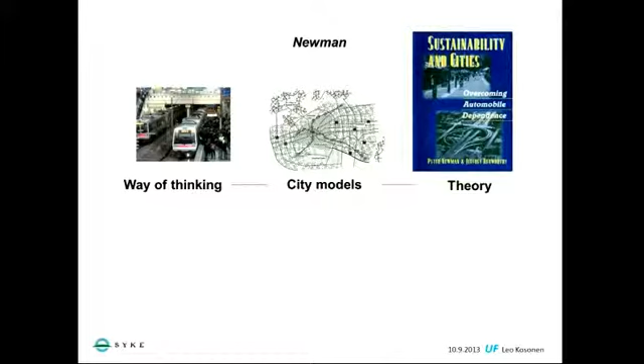Peter Newman, as you heard, is very experienced in theory, global cities. He's been using the same type of model, but he also has a long practice in local questions. So, in a way, we have very much in common, and especially the model. Basically, the models are showing that our way of thinking is very parallel, and it's been very useful to meet Peter and to have discussions with him.

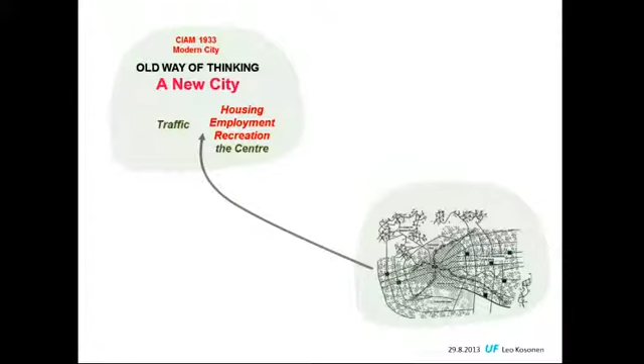The basic thing is that we need a new way of thinking. I faced it quite early in my work. You all know this present way of thinking. It's based on old ideas of a new city 60, 70 years ago. Everybody can recognize these three functions: housing, employment, recreation, and traffic, which is combining these functions. Actually, they are not functions, they are land use categories.

Actually, we have a pattern of two main systems to analyze our cities, and we have two types of models. We have land use models and traffic models, network models. And that's quite a strange situation, because the cities, as Peter was showing, are a combination of three fabrics, three comprehensive systems. And we try to analyze and supervise this combination of three systems with tools which are based on two systems which don't recognize these basic three systems.

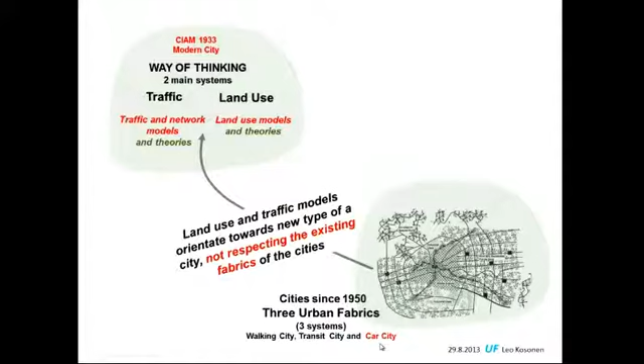So I found it's a very strange situation, and in practice it can be used mainly to analyze and improve the car city fabric. And afterwards, I understood that there's no comprehensive theory behind these models or behind this way of thinking. And so these tools were not useful when my task was to understand what's happening in terms of car city development, how to analyze it, how to deal with it. And that's the basis of the need for a new way of thinking.

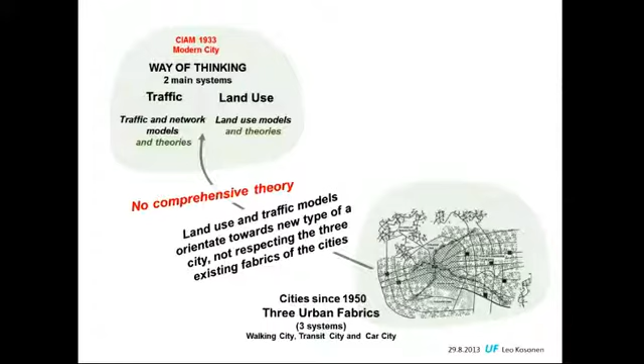So actually this way of thinking has been a serious mistake, and it has led to serious mistakes. They are useful when this way of thinking is combined with incremental thinking, so it can lead to really nice, innovative solutions. But we have seen that it has led also to really bad mistakes. Okay, so the need for new thinking.

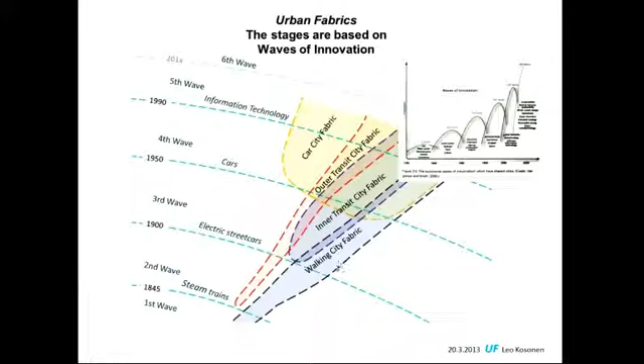First of all, it's important to recognize that these fabrics exist. As Peter was showing, in history we have faced several waves of innovation which have influenced our cities, and in terms of the fabrics you can clearly see the stages of the history of fabrics. The first stage is the walking city, which is the oldest one, and the first stages of the transit city. They were quite clearly distinguished,

or there are some theorists who have distinguished them. For instance, Peter Hall mentions two stages of a public transport city, the early stage and the later stage. So in terms of these periods, these two systems are recognized. But then the third one, which is now the situation, we have walking city, transit city and car city fabrics. That's something which has not been recognized.

And maybe one of the explanations is that the car city fabric was different from the previous ones. It was not growing only on the sides of the previous fabric, but it started to grow over the previous fabric. So from the very beginning, it was covering the whole city.

And the ideas of the modern city were also oriented towards the future. A new city which would be totally different from the old industrial walking city and old congested transit city. It would be a totally new city, and these two things, car city fabric overlapping the old fabrics, and the way of thinking that we are building a new modern city, when these were combined, everybody seemed to have forgotten that the transit city and walking city fabrics exist.

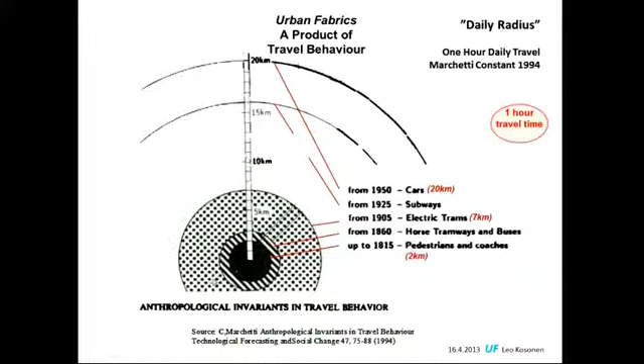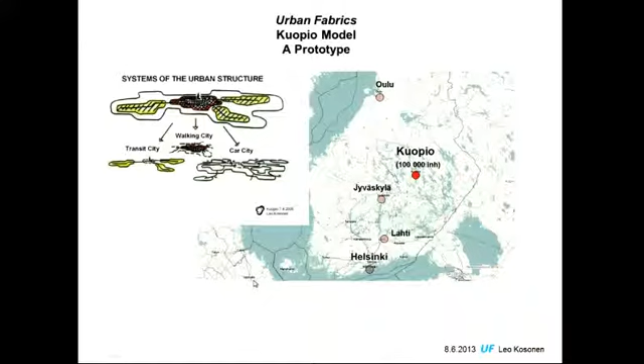And that's something which I, in my work, recognized. The same thing already some 20 years ago, when I've been working in Kuopio. The same phenomenon could be recognized also in my case study cities, which I have in this urban fabric project, which I've been doing. And it was quite clearly distinguished.

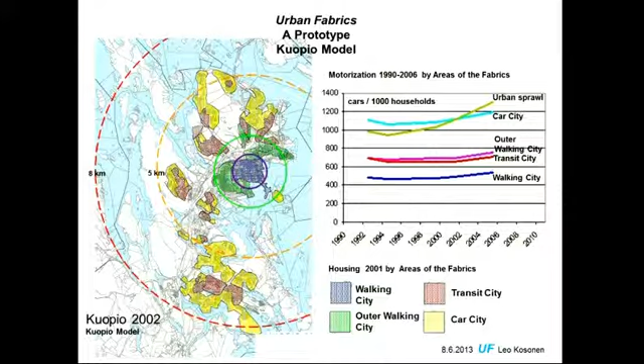The same phenomenon could be seen when I was analyzing these 4 case study cities. They have clearly the same type of structure. Of course, there are differences, but basically it's the same. I was analyzing also the stages of development.

The old walking city was clearly distinguished, and when the transit city started to grow, the car city fabric was growing even faster. So here, for instance, in Kuopio, at the same time that we had the first units of the transit city fabric, we already had a freeway bringing people from both municipalities, from north and south, to the city center, even if we didn't have cars.

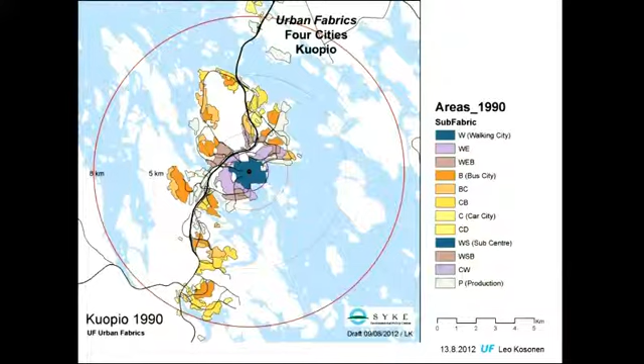The next stage was construction of the transit city fabric to its full extent, and the next stages have been construction of both transit city fabric and car city fabric. And that has happened in all these four cities.

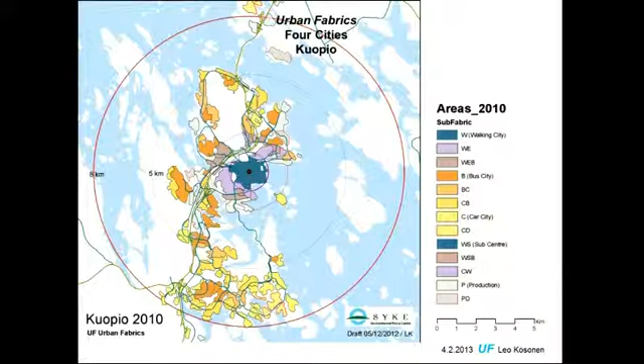So from these case study cities, I became more and more convinced that it is 2 kilometers and 8 kilometers. Actually, earlier I thought it's 10 kilometers, but based on the case study cities, it's quite clear that 8 kilometers is the width of the inner transit city fabric.

And once these circles were discovered, when I've been testing it in other documentation like this urban zone documentation, it looks like it's functioning in smaller cities, smaller towns and bigger cities. And when testing in international documentation, it's the same result.

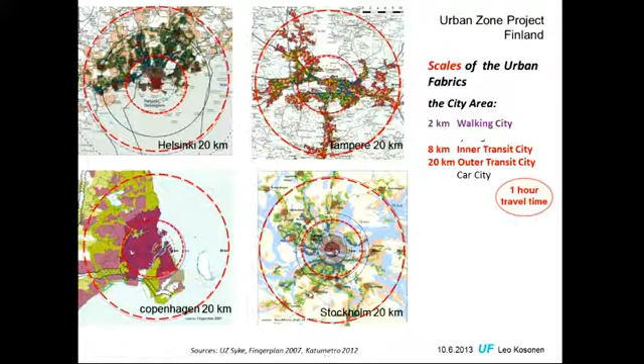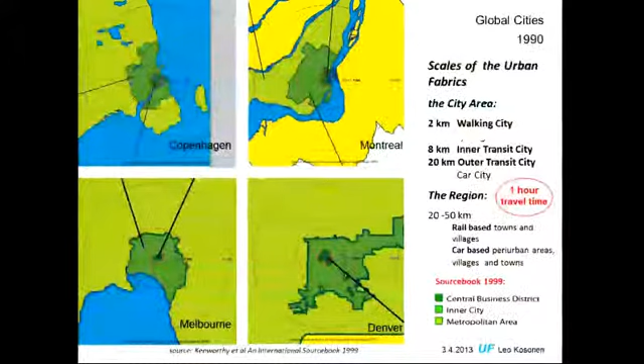And very valuable documentation is this international source book that Peter Newman and Jeff Kenworthy have compiled. I could use all the maps and data of that survey. It's an important documentation, and actually for me it's the only documentation that I could find about what has happened during the last 50 years in terms of walking city fabric and transit city fabric.

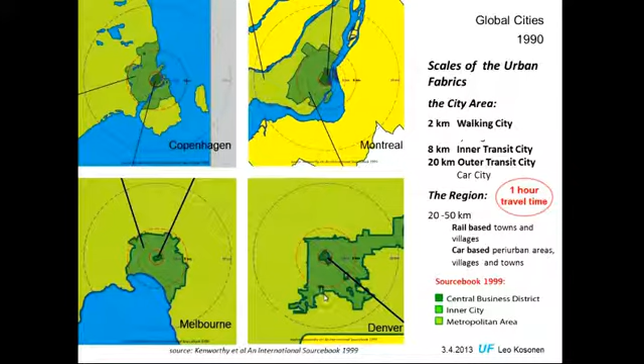And these were clearly showing the same distances, 2 kilometers for the walking city fabric, 8 kilometers for the inner transit city fabric, and about 20 kilometers for the outer transit city fabric. It could be seen from the basic maps, but very clearly from the special maps which had the documentation of transit systems in these case study cities or global cities.

And from this data, you could see the basic development, what has happened in terms of fabrics, the inner transit city fabric, which has been strong. It has lost a lot of population because of increase in the living space standard.

The car city fabric has been growing, but the basic thing is that in addition to that data, we are clearly missing surveys which would tell the history of the car city fabric or history of the transit city fabric since 1920 or 1930.

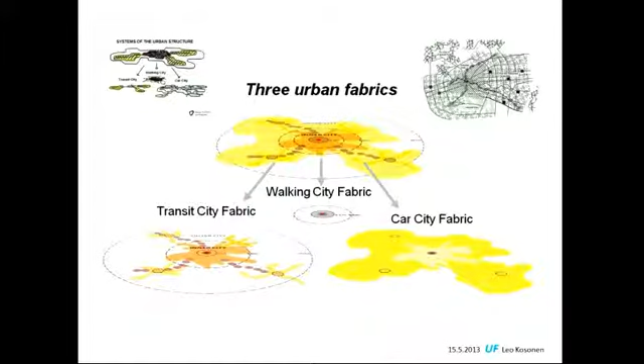Okay, conclusion: even if the documentation is not very large, we have a lot of information, data, maps, making conclusions about the basic model combining the previous ones. And these are our conclusions about the basic dimensions of the fabrics. Walking city fabric is within the radius of 2 kilometers, and the intensive part is usually within 1 kilometer.

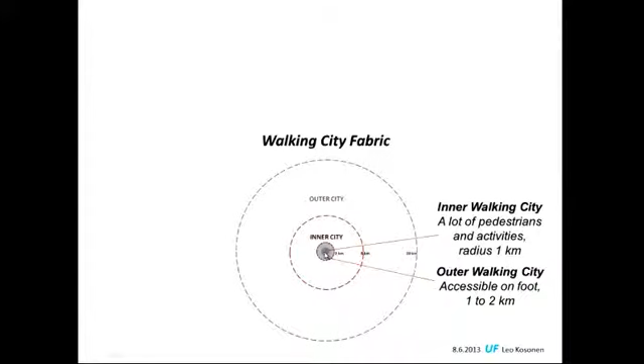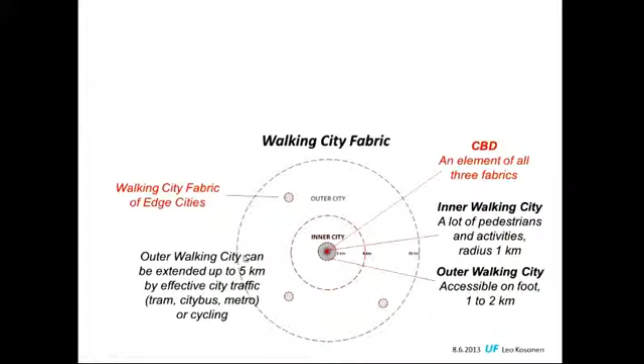But in big cities or cities like Helsinki, where walking and transit based on trams are very closely combined, the combined walking and transit city fabric can extend even up to 5 kilometers, like in Paris or London. And then there are sub-centers, edge cities, which have their own walking city fabrics.

Transit city fabric based on trams and basic bus lanes seems to be extending up to 8 kilometers. There are trams which go longer than 8 kilometers, for instance in former socialist countries where they have straight tram lines and ulitsas where trams can go fast, but there are a lot of systems where trams extend only up to 5 kilometers. But this 8 kilometers is a good scale to analyze the inner transit city fabric.

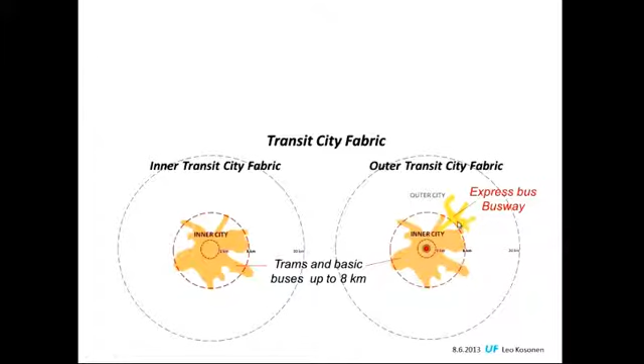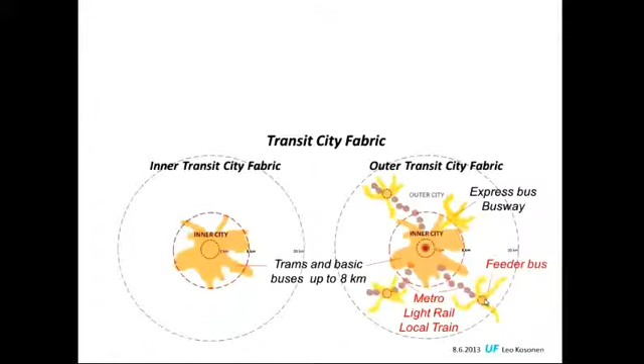Outer transit city fabric: there are two types. One is based on fast express bus lanes or busways, and the other means rail, which gives the proper capacity for the outer transit city fabric, and it also gives potential for feeder bus lanes. So basically, outer transit city fabric is either strings of pearls of railway stations, but there can also be edge cities or bigger units which have feeder lines.

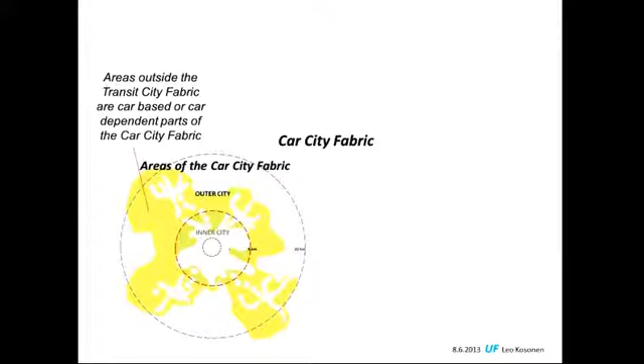Car city fabric: usually you recognize the areas which are car dependent, which are outside the walking and transit city fabric. That can be clearly recognized. It's much more difficult to recognize the rest of the car city fabric, and that's important to understand. The car city fabric is covering the whole city. It's covering also the areas of the transit city fabric and the walking city fabric.

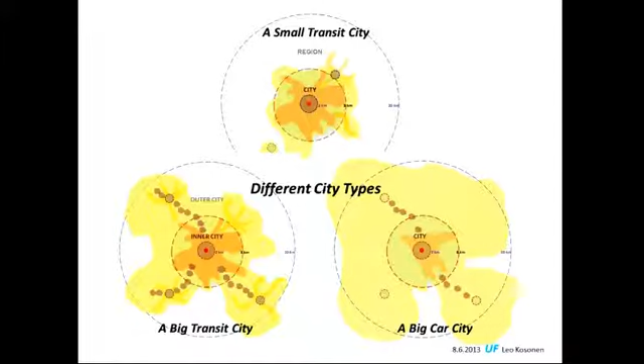So the model that we are compiling and using is not only a zone model. It's a model of 3 comprehensive systems, and they are overlapping and mixed with each other. And so cities of different types, as Peter was showing, are combinations of these 3 fabrics in different ratios. Here are some examples of how this basic model, which we feel can be a basic global model, can be used for comparison of any city in the world, of any size, of any type.

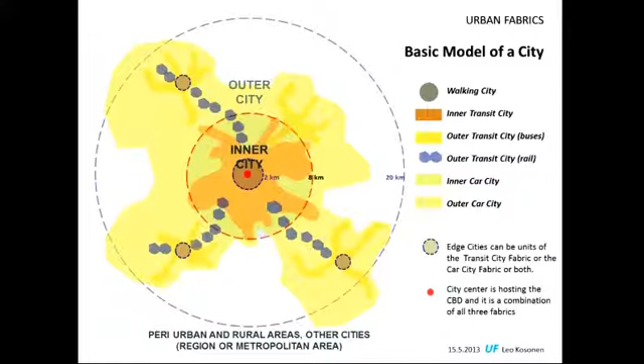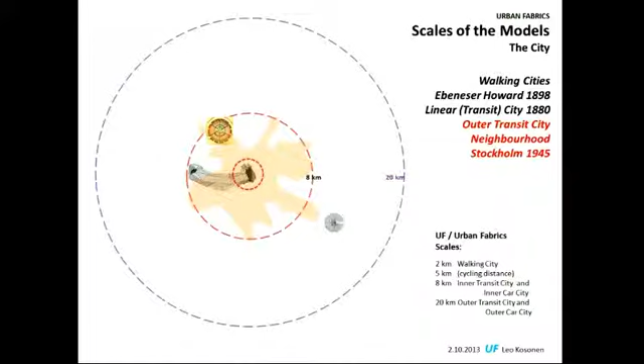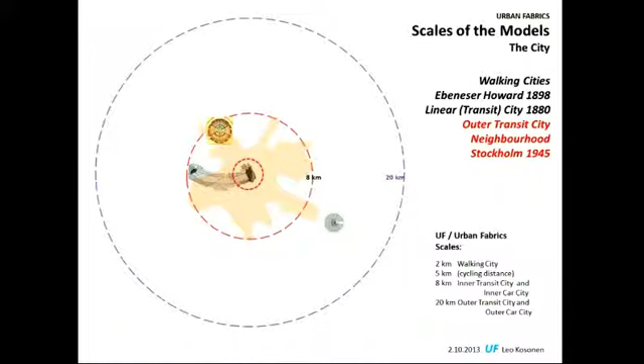The next example is a rail-based neighborhood unit from Stockholm, 1945. It's even more compact than this walking city of Ebenezer Howard. So they understood that the walking distance in a transit city unit is even shorter than in a proper walking city.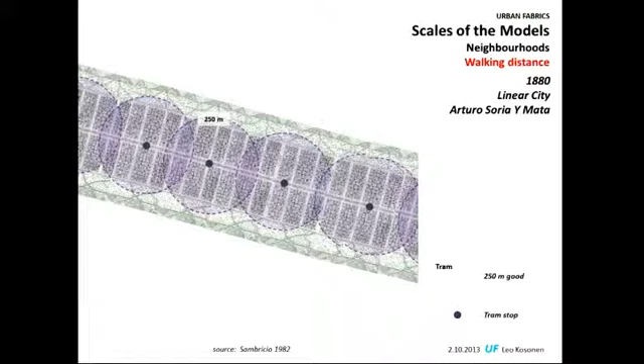Some examples on a smaller scale. The same model from Arturo Soria y Mata, when the first trams had just started to run in Madrid. So he made a model of this transit city, and he's using a walking distance of 250 meters. So he was very realistic, because that's my experience of the proper walking distance in terms of transit city fabric.

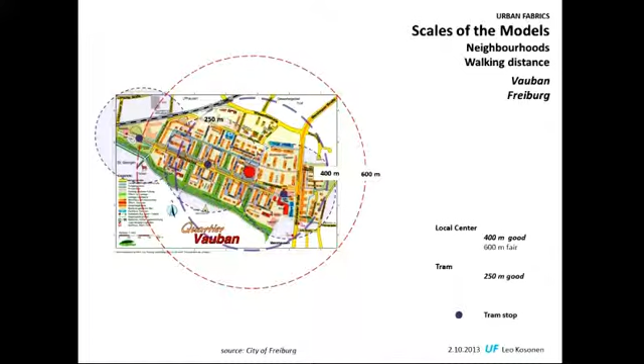The same can be found in Vauban, in Freiburg, the same distance, 250 meters, but the difference is that now it's not only a line of tram stops, it's a neighborhood which has its own services.

And this example from Stockholm, a rail-based neighborhood, the walking distance here is longer, 400 or up to 600 meters. That's our experience, for instance, in Helsinki. I think Myyrmäki, people in Finland know, has about the same dimensioning. It goes up to 800 meters, but that's clearly the maximum walking distance which is still walkable. If it's bigger, then you need feeder buses or some other systems.

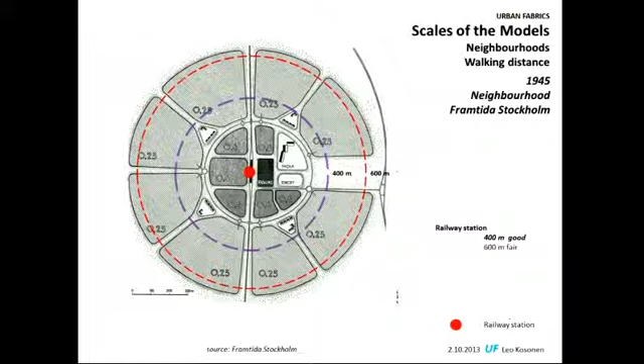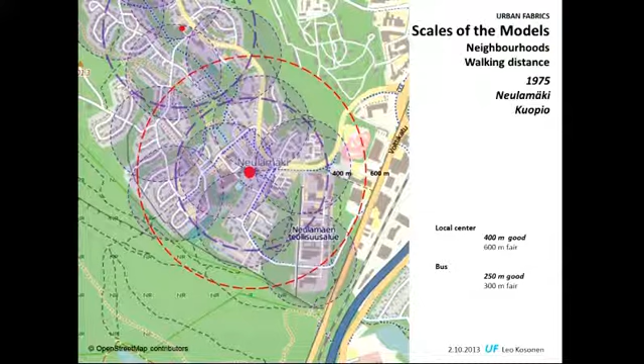I come from a bus city, so I'm interested in walking distance in a bus city, visiting from Kuopio, and our experience is that the good walking distance to a bus stop is 250 meters, the same as with trams.

But then when I analyze other cities, it's very common to have the system of superblocks or precincts which are about 1 kilometer wide, like in Milton Keynes, and that means that when buses go along the main roads, either the walking distances get long or there are proper walking distances only on the sides. And you can see it in practice if you look at these kinds of areas: they are clearly part of the car city fabric, even if there are buses running on both sides, but they are running too far.

The same kind of phenomenon I think I can distinguish, for instance, in Almere, which is an excellent place in terms of the rail transit fabric, but then the other part of the fabric, the area of feeder buses, is clearly part of the car city fabric, or its dimensioning is the dimensioning of the car city fabric.

Okay, then some words about the model. It's not only the areas, distances, it's also elements and qualities. We have made with Peter a list of several elements classifying, and they can be clearly classified so that there are certain elements which are typical for walking city fabric, elements which are typical for transit city fabric, and elements which are typical for car city fabric, so that they can be found in the other areas' fabrics only occasionally or for special reason.

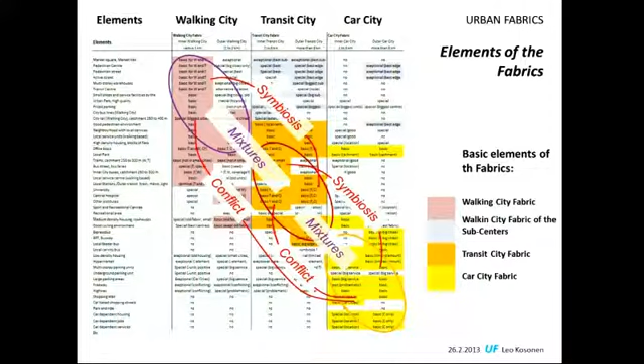But even after that, you must notice that there are also elements of car city fabric and transit city fabric which can function in a close symbiosis, and there are mixtures of all these fabrics, mixtures of walking and transit city fabrics, and mixtures of transit and car city fabrics. So all these things should be recognized, understood and taken into account when you use this kind of models. But this opens potential or ways how you can enter real questions once you realize this.

Okay, when I've been speaking about the model, I've been mainly speaking about how it can be used for analysis. But the same way of thinking, the same model can and must be used also to set targets, to make future plans, to make models, and they are in continuous connection with each other.

Peter was speaking about a new theory, so I show... what's that? A simplification, the way I see the basic things of the theory.

So as we've been explaining, it's important to recognize and understand all these three fabrics, to have an analysis model which can recognize all these three systems. We must have future models which can deal with all these three systems in terms of repair and regeneration, and then we must have the way of thinking which is guiding the use of both of these systems.

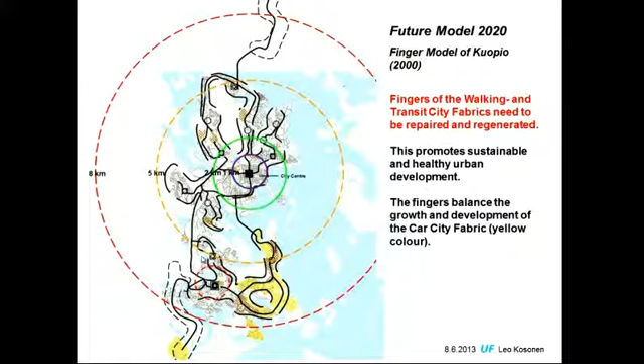Okay. So to the end, I still show some examples about how I've been using this in practice in my city. So we have had this kind of finger model defining the goals of how to develop the walking and transit city fabrics in relation to car city fabric. And based on that, we have made a new pedestrian center, which is now still under construction, but will be one of the most extensive and I think best one in Finland. We have a special network of alleys like they have in Melbourne.

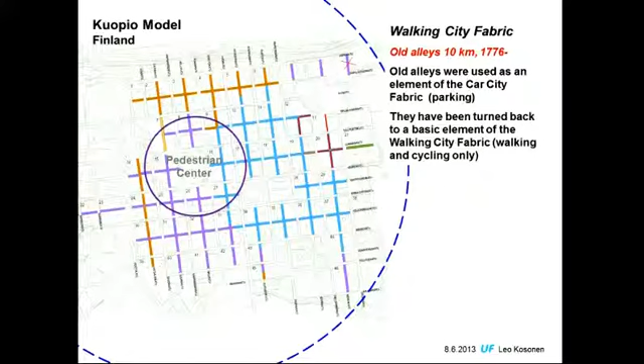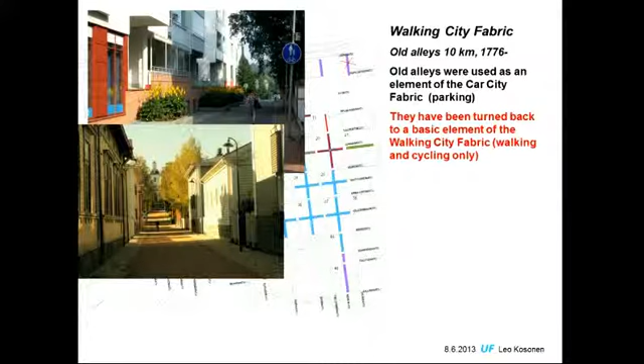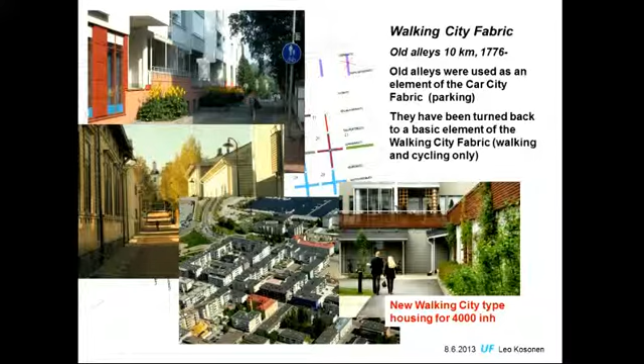In Melbourne, they have been turning them to pedestrian streets. We have been turning all these alleys to pedestrian streets or pedestrian alleys, and so we have a network for pedestrians with a total length of 10 kilometers, covering the whole walking city area. And it's not only the alleys; the cars have been removed and they have been turned to pedestrian access. We have also had quite extensive new housing production, a new type of housing oriented towards walking city fabric, implementing the walking city fabric with closed courtyards, no cars. Parking requirements were lowered so that the parking is underground, and we have continued with the small alleys.

The other example is about the transit city fabric. These fingers are based on old chains of neighborhoods, but the neighborhoods are very small. For instance, this one is only 2,500 inhabitants, so it's too small to maintain a proper bus transit. So we had a project to extend it with a new development of 1,300 inhabitants. We were using special means, so that we have here a bus bridge combining the area, and the design of the area is bus oriented, so that the buses are going in the middle. People have only from 50 to 150 meters to go to the bus stop.

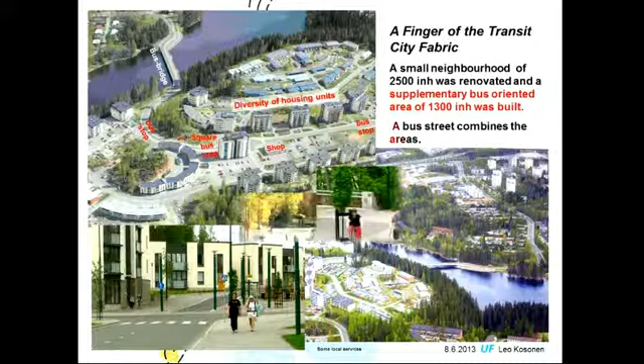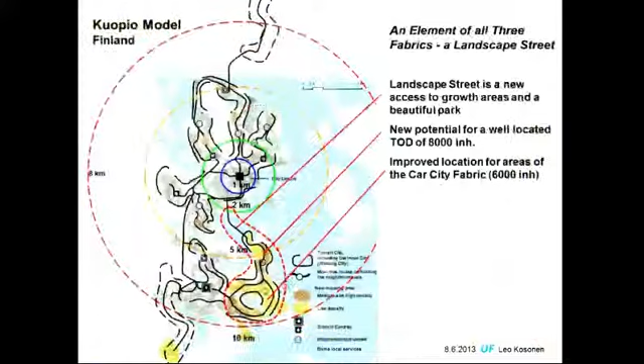And it's been taken into active use for almost 13 years, and we have been following the bus use, and our data is showing that people are using buses in the new area in an even more active way than in old areas, which is quite exceptional.

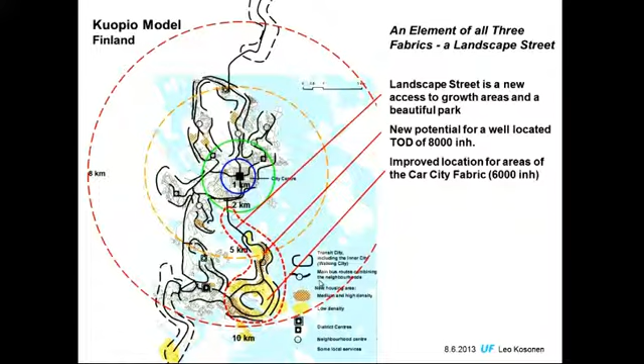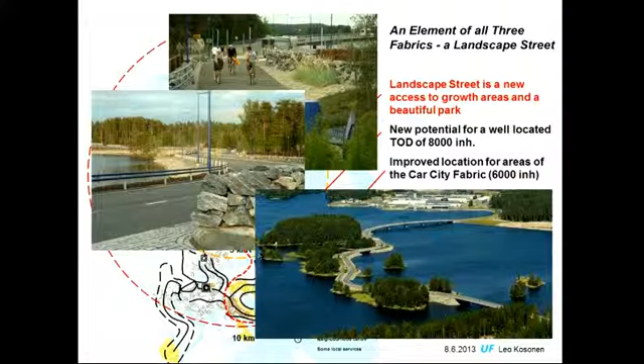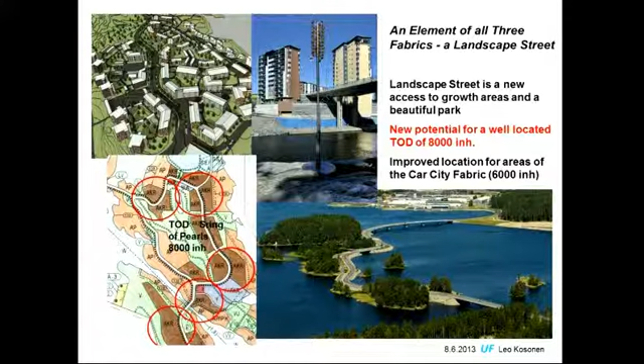The third example is a quite large development project. We call it District of Islands. It's a combination of a new type of road, which is located in a beautiful landscape so that it doesn't destroy it, but makes it part of the walking city fabric, or an extension of the walking city fabric. Recreational area, good pedestrian and cycling connections to the new areas, and the core of the new development is a bus-oriented development, we call it string of pearls, 5 units which are combined with good bus transit.

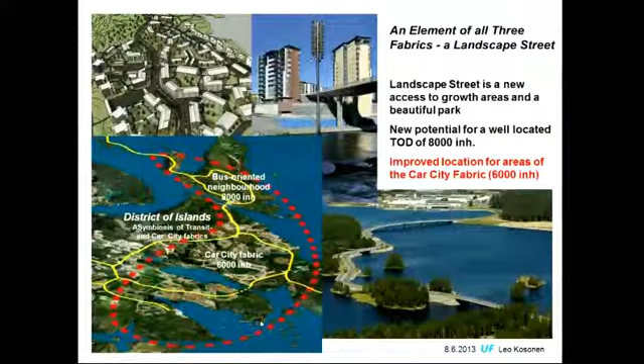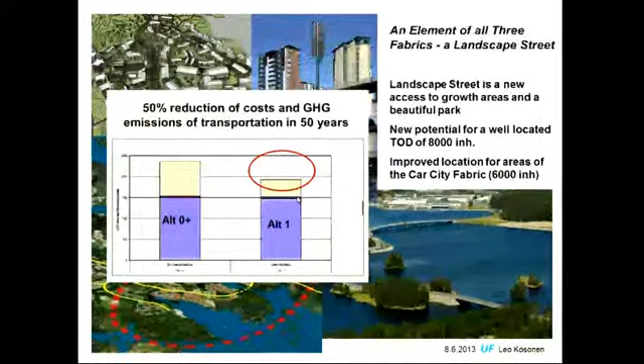And this bus-oriented development of 8,000 inhabitants has been combined with existing car city areas, so that they can function in symbiosis, so that also the car city fabric has good bus transit using the same bus lines as the transit city fabric. Before we made that, we had to make an environmental impact assessment, and one part of it was the economy of the transportation and the greenhouse gas emissions. The assessment showed that this model, oriented towards transit city fabric, compared to the model based on conventional car city fabric, will lead to a reduction of all of it: the cost of energy in traffic of the new areas and greenhouse gas emissions will be 50% smaller than they would have been without this bridge, the new connection and this type of urban fabric.